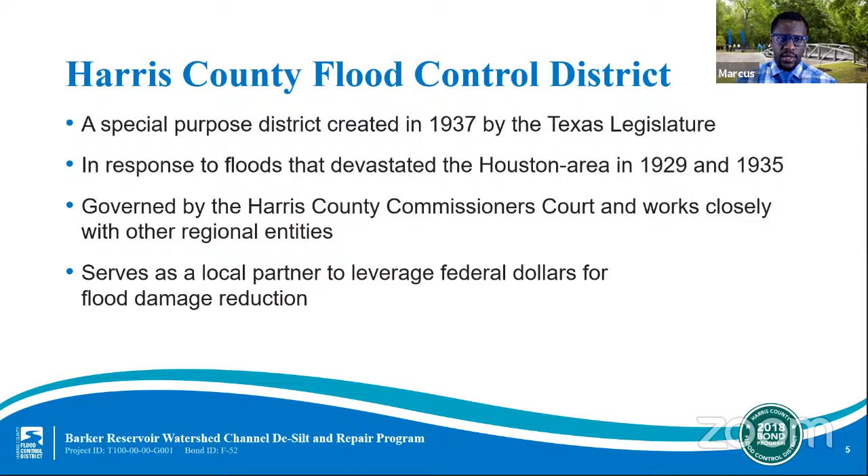The mission of the Harris County Flood Control District is to provide flood damage reduction projects that work with appropriate regard for community and natural values. One of the most difficult challenges we face is constructing effective projects that are sensitive to community and natural values in a highly urbanized area.

Harris County includes 22 main watersheds, totaling approximately 1,800 square miles and more than 2,500 linear miles of channel. 2,500 miles is approximately the distance from New York to California. A watershed is a geographical region of land that drains to a common channel or outlet. Each watershed has its own unique characteristics and needs. The project we're presenting tonight is in the Barker Reservoir Watershed, located in West Harris County.

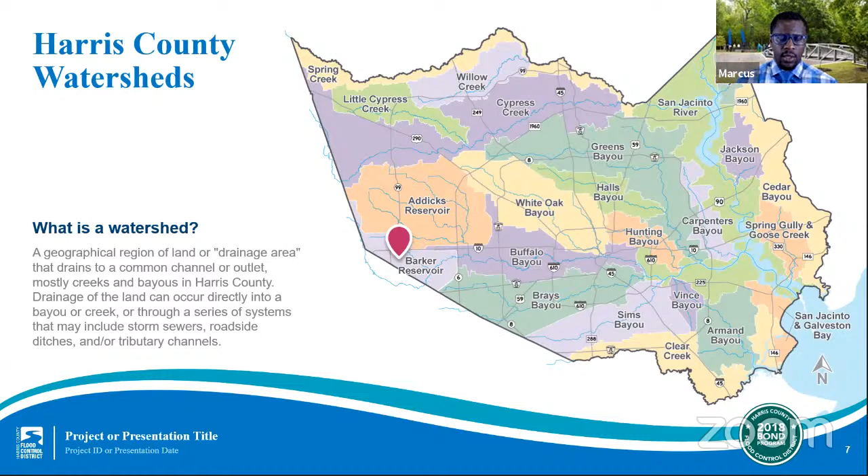Our area is flood prone, and here are some reasons why. We have extreme rainfall, including tropical storms and hurricanes. We have flat, slow draining land. We also have clay soils that do not soak up excess rainfall quickly. While the Flood Control District plays a critical role in the flood risk reduction, we are one of several entities in these efforts in our region.

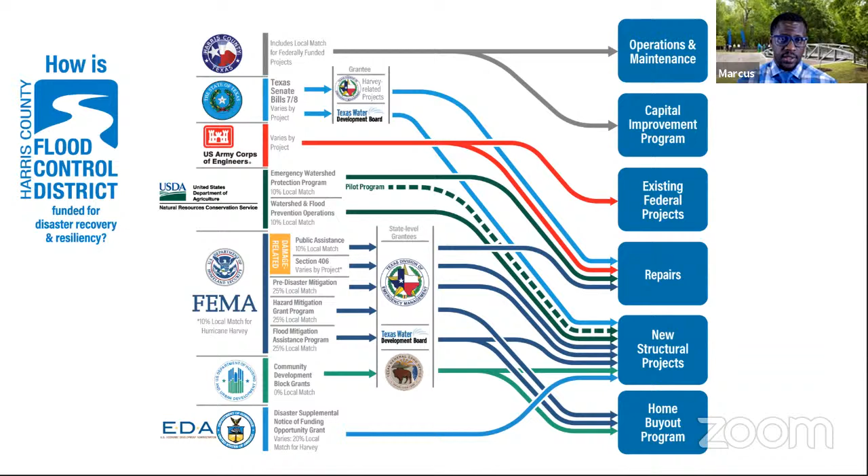This graphic illustrates the many sources of those partnerships, including federal, state, and local funding that the Flood Control District is working to secure for Harris County. Each agency has its own definition of eligible projects and its own requirements for local match funding. So the Flood Control District works diligently to match projects to the right partnership opportunities.

We will now move into the part of the program that is specifically about the Barker Reservoir Watershed Channel De-Silt and Repair Program. There are 47 miles of open waterways that drain into the Barker Reservoir. That makes up the Barker Reservoir Watershed. This program includes 2 phases: the desilting of channels to restore them to their original capacity, and the repair of channels where erosion and slope failures have occurred.

The de-silt work effort began before Hurricane Harvey as part of a watershed maintenance program. This program consisted of channels within the Barker Reservoir Watershed for which the Flood Control District has property rights. The limits of this program did not extend west of the Grand Parkway. Channels included have been previously developed or altered from their natural state.

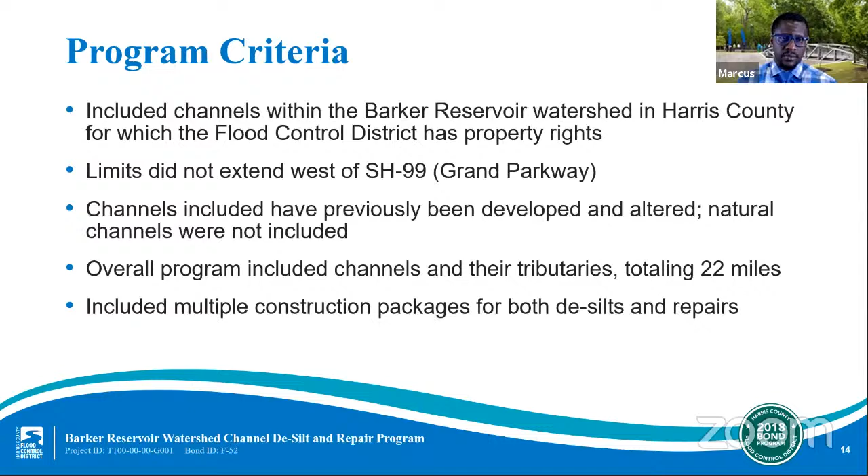The goals and objectives of this program included desilting channels, repairing channel segments, and creating a database for future maintenance efforts. This database will help the Flood Control District effectively develop a maintenance and operations manual.

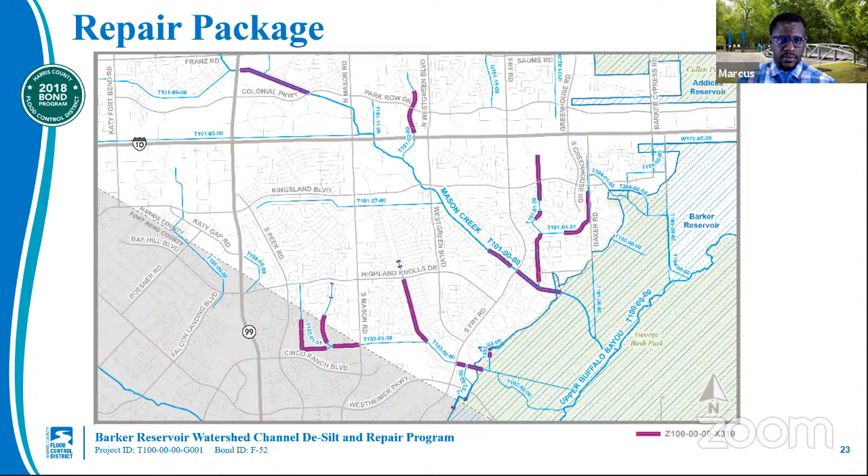This repair package exhibit highlights the areas slated for repairs, shown here in purple. These channel repairs will help stabilize the channel and prevent further erosion and damage to the channel. The current status of the repair package is 60% complete, and the construction is anticipated to begin in spring of 2022.

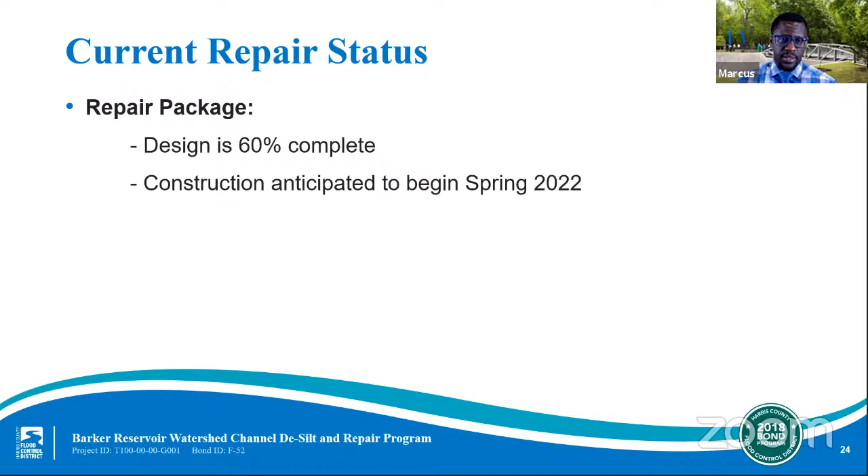So what should you expect during construction? There will be heavy truck traffic and possibly lane closures that run adjacent to our project sites. We will have limited access and/or temporary closures to trails and footpaths. Traffic control will be implemented when necessary along roadways for the safety of the working personnel and the public. Tree removal may be necessary for construction access, and the Flood Control District is coordinating with the appropriate agency for the relocation of trees affected by construction.

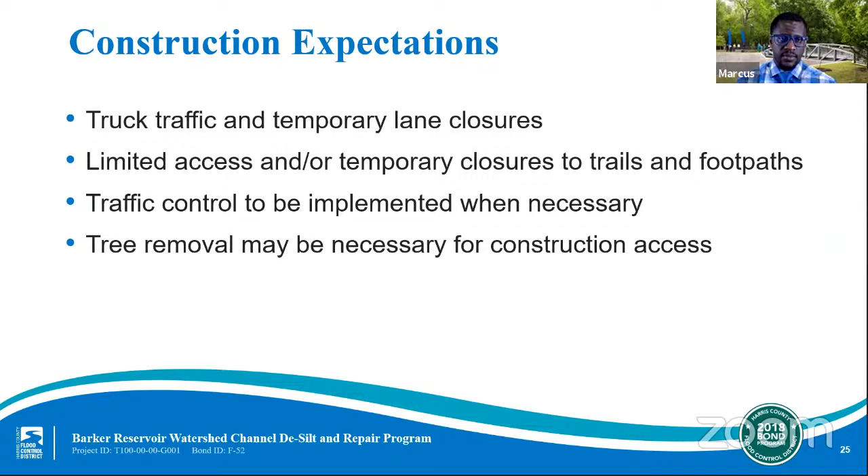So what are our next steps? This is the final community meeting for this program. All updates will continue to be provided on the Flood Control District's website. Construction of the remaining work will continue through fall or winter of 2023. The data collected will be used for future maintenance plans.

While the work on the Barker sediment removal packages has concluded, additional money was awarded by the Federal Emergency Management Agency to the Flood Control District. These funds will allow for additional sediment removal to take place along channels in the Barker Reservoir Watershed. The timing and specifics of those locations are still being determined, and you can read more about the FEMA award on the Flood Control District website in our press room.

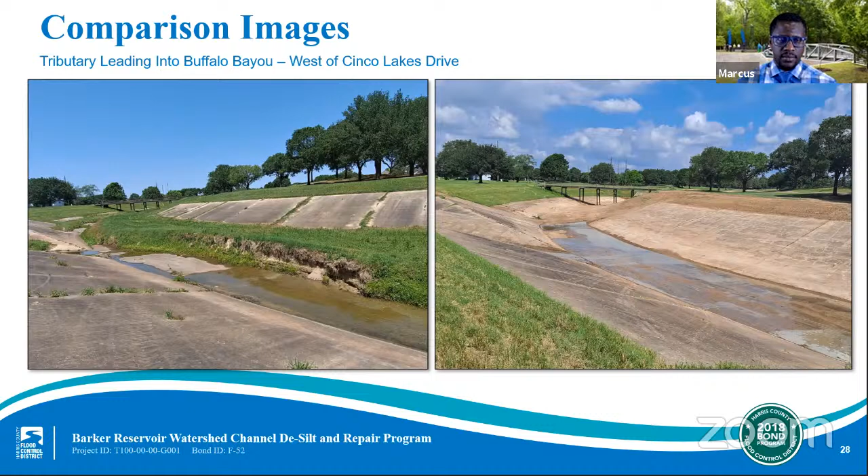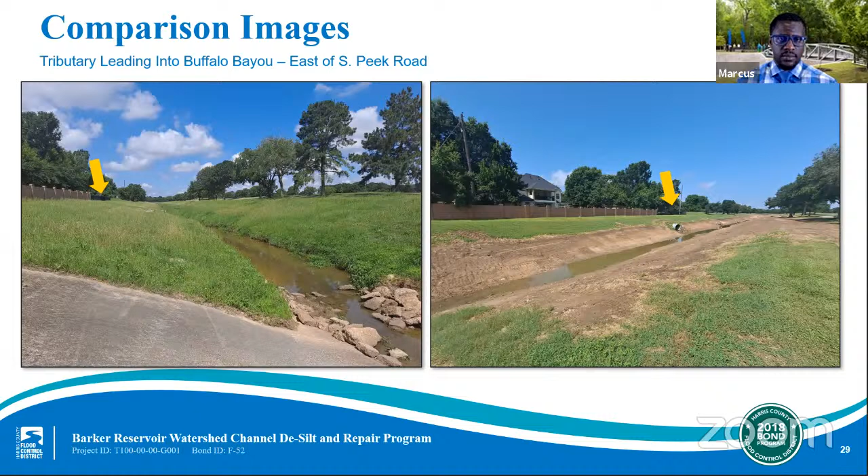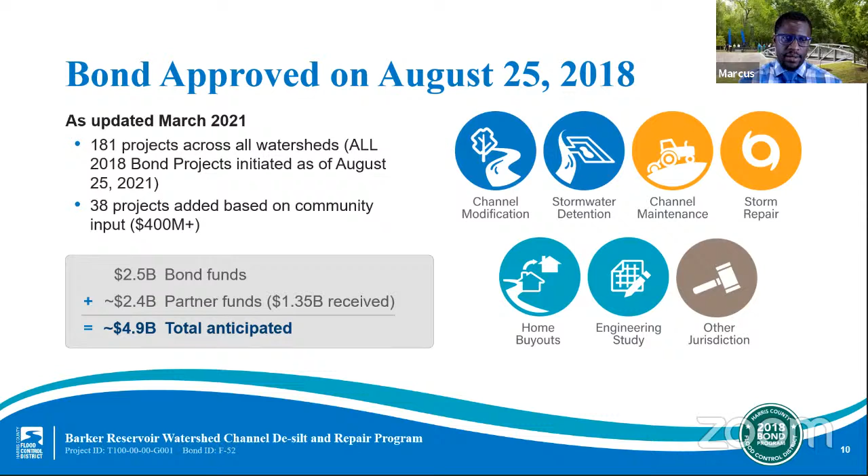Because as we reach towards the end of the bond program in the next 6 to 8 years, that means there's going to be more maintenance necessary. And so right now the district is trying to prepare for that additional operations and maintenance that we know we're going to encounter. But that's a good question. Great. Thanks so much, Marcus.

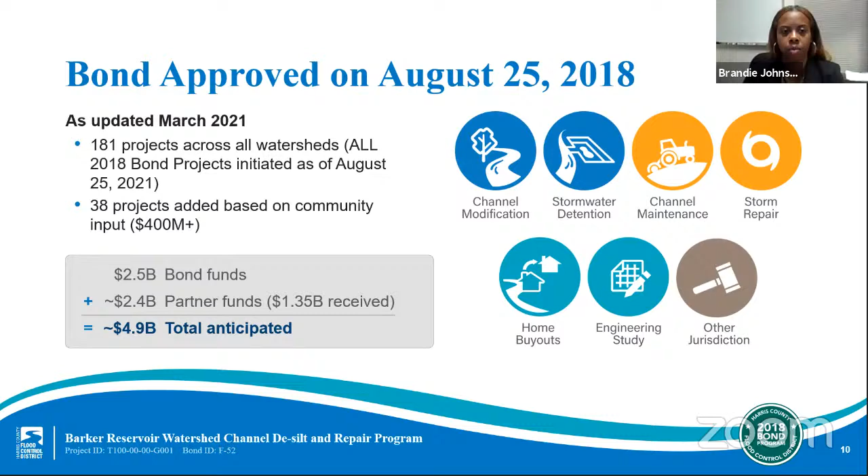Thanks, Brandie. All right, Marcus, I'm going to come back to you for our next one. And this is a great one. A resident is wondering how the recent FEMA funding that you mentioned will be used for future projects. Okay, yes, that's a good question. I somewhat mentioned that in my previous answer. This $250 million that we're going to receive is for the Willow Creek, White Oak, Spring Creek, Little Cypress, Greens, Barker, and Addicks. What we plan to do is bid out, or do what we call request for qualifications, to obtain consulting services to help us manage and design those projects.

As part of those funds, we've been given a certain amount of time to finish the project. I think we have 4 years to complete them, which is why we're bringing on the additional consultants to help us with those other watersheds that I mentioned that the funds will be used for. Okay, great. Thanks so much, Marcus.

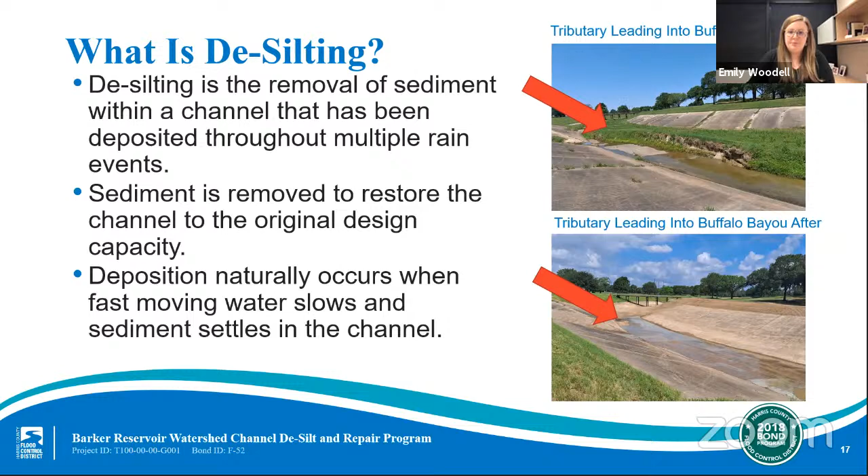The scope of work for the De-Silt included 22 miles of channels and tributaries along Mason Creek and Upper Buffalo Bayou, where Harris County Flood Control has property rights, with the majority of the channels being within Harris County. Approximately 17 miles of the 22 miles of channel were included in the desilting effort. And then the repair package will include repairs along the majority of the channels that we previously desilted.

Perfect. Thanks, Brandie. I'm going to stick with you for our next question, a great one from Susan, asking what the contractor does with the sediment. Is it sold? And wouldn't a fast flowing stream remove the sediment naturally? Good question. The sediment removed from the channels has to go to an approved disposal site. Before the contractor can remove any material off-site, they have to submit where that material will be sent. And once it's submitted, the flood control district will review and approve those disposal sites.

Each channel is designed to convey a certain amount of water, as well as at a certain speed. So by desilting and removing that sediment, it's not going to necessarily speed up or increase the velocity at which the water will flow downstream. It will flow at the same design velocity that it was designed for.

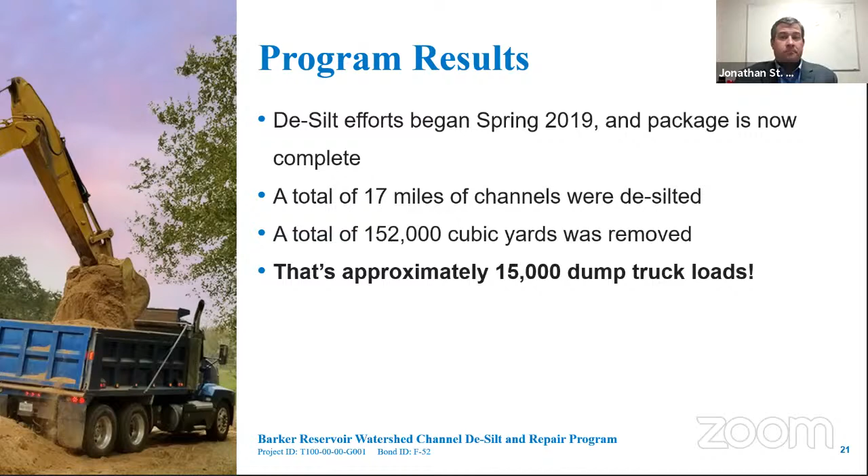Sure. So de-silt projects don't increase flooding risks in any area, either upstream or downstream of the project site. These projects are designed to improve stormwater conveyance by restoring our channels to their original design capacity. And so by removing the silt and sediment, we're just bringing the channels back to the way that they were originally designed.

Perfect. Marcus, on that topic, someone asked why we typically don't dig these channels deeper and wider to accommodate more water. Could you talk about that? Sure. So the intent of this project is to de-silt, right? As Jonathan just mentioned, this is to take a channel that was designed to carry a certain flow, which is what Brandie said. And whenever you start to move outside of those parameters for the original design intent, then you start to do what we call increasing conveyance capacity.

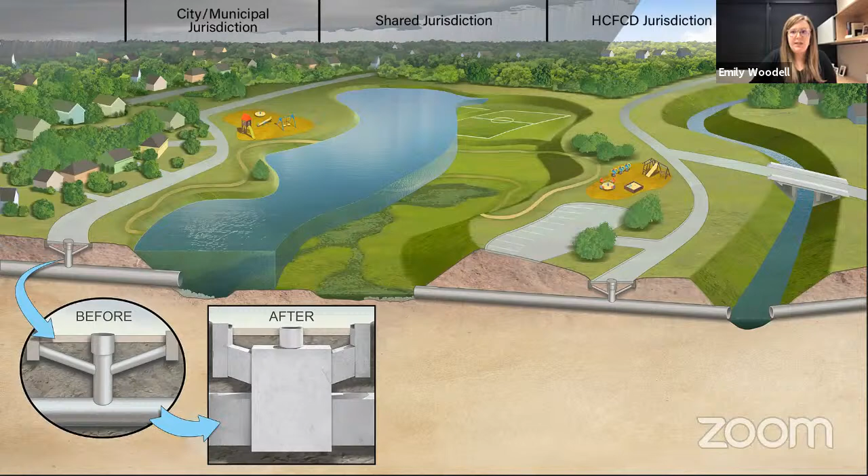Perfect. Thanks, Marcus. And I'm actually going to stick with you for our next one, because we had a very similar question come in about the reservoirs themselves. So they said, instead of all this work, why can't you excavate the reservoirs to hold more water?

Yes, and thanks for that question. And that's also one of the common questions that we get. So the reservoirs are actually owned and operated by the Corps. The flood control district, we don't have property rights to conduct any other work in the reservoirs. So, again, which is why on this program, we sort of focused on the desilting of the channels in the reservoir and working in right of way that the flood control district actually owns.

So the flood control district doesn't maintain the reservoir. That's part of the Corps' effort. And so, questions about doing work inside the reservoir or operations and maintenance of the structures of the reservoir, anything like that, those questions we actually direct to the Corps.

Wonderful. Thanks so much. Brandie, I'm going to come to you for our next question. We've had a couple about this topic. Folks are wondering how trees will be impacted by the project.

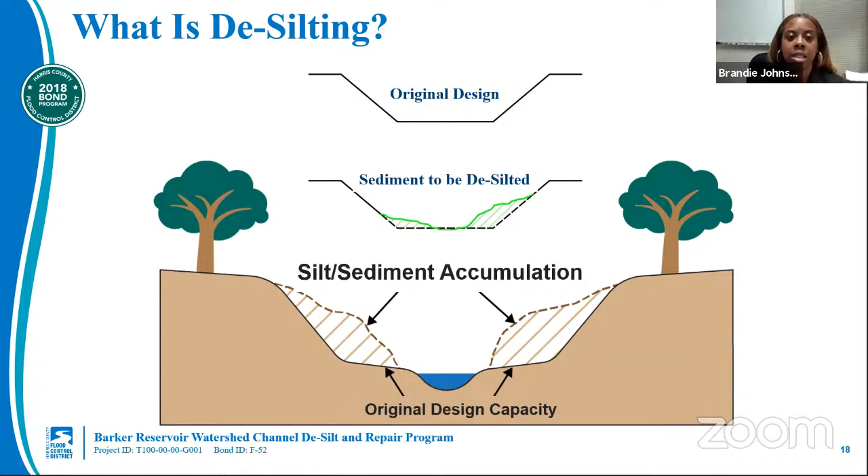An essential part of being able to do the repair project has to do with accessing the project site. So trees can either be trimmed or removed to allow the contractor to be able to bring in equipment and other machinery to do the repairs. So we will work closely with the contractors as much as possible in order to be able to minimize the amount of trees that will be impacted by our repair project.

And in addition, during our design phase, we also try to get with the different entities that may have planted those trees and see if we could potentially relocate those trees so that they won't be damaged, and place them in an area where they won't necessarily affect the access and can continue to flourish and keep a park-like setting within the area or other areas along our channels.

Perfect. Thanks, Brandie. And you actually answered 2 in 1 there. So we had another question come in about trees, and I think Brandie just addressed it beautifully. So Jonathan, I'm going to come to you for our next one. We've had a couple folks ask questions about how local trails and footpaths will be impacted.

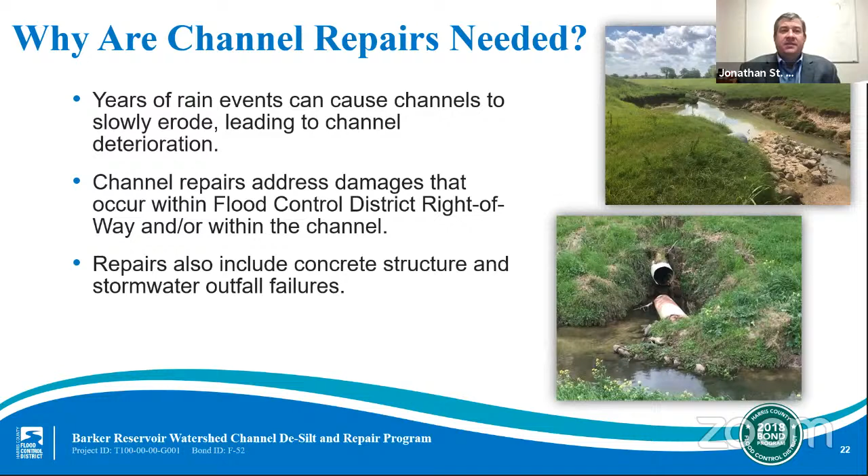Sure. So the trails and footpaths would mostly be impacted during the access portion of the construction. And so as the contractor needs to get equipment in and out of a project site, typically they'll have to cross over some of these trails and footpaths. And so that's where you would see some disruption from time to time on those.

And so the plans for that are to communicate those closures as early as possible. And that would either be via signs on the site or on our website to let you know where these closures were going to happen. And then you would also see some construction fencing around that would make sure to separate those areas and to separate pedestrians away from the access routes of the heavy construction equipment.

And those closures wouldn't last terribly long. Hopefully they would be temporary and would not cause too much of a disruption. But we do have to get our heavy equipment in and out of the project sites. Sure, absolutely. Thanks so much, Jonathan.

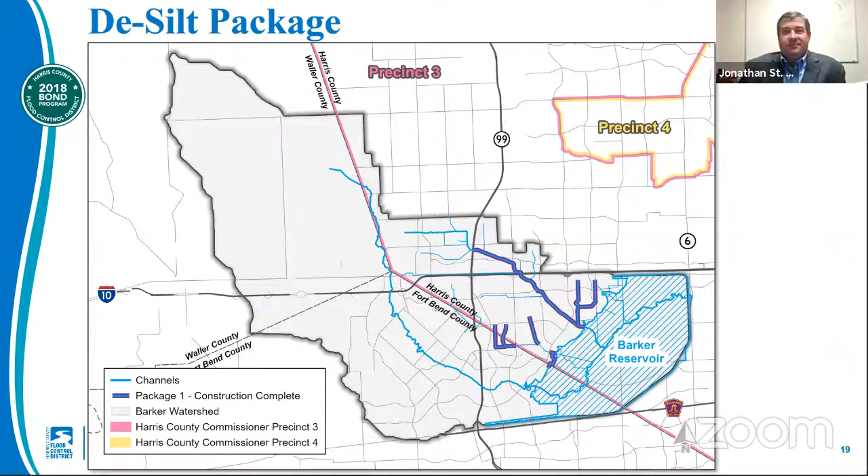That's helpful. Thank you, Jonathan. Okay, Marcus, so I'm going to ask you a question that we get a lot. A resident asked if they have some questions about the mowing of channels in their neighborhood, who do they talk to about that?

So actually they can go through our website and submit it to our community service division. They do get a lot of questions about mowing and when we'll be out there, and they'll be happy to give you information specific to your area. But they're also on the website. There's a location where we have a map that lets you know the last time an area was mowed and tells you the next time we'll be out there.

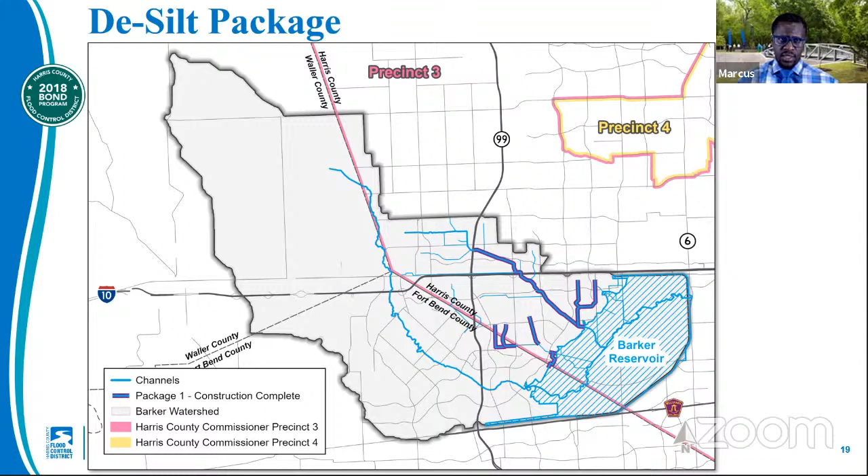We have a mowing cycle of 3 times per year, and that could also give you an idea of the expected time in which we'll be within a certain area to do mowing. But community service division, they do a great job of making sure that they're being responsive, getting out to the residents and addressing some of these issues that the residents bring up. They do a really good job at that. Yep, absolutely.

Okay, Brandie, we had another really good question come through asking, are you removing the trash and larger debris people have thrown into the channels? Yes, a part of the desilting effort did include the removal of large debris and trash from the channels as well. And so if more trash has been dumped when we come out to do repairs, the contractor will pick up that material as well. Great, thanks so much.

And I'm going to stick with you for our next question. We also had somebody ask, when and if these channels start to fill with silt again, who do folks notify? Yes, the residents can go to our website and fill out a service request form. It's a long website link, so the easiest way I suggest is to look in the search bar on the website and just type in service request, and it will direct you to the form to fill out.

There's also a number that you can call to speak to or leave a voice message that can address that inquiry as well. And that number is 346-286-4197. Great, thanks so much, Brandie.

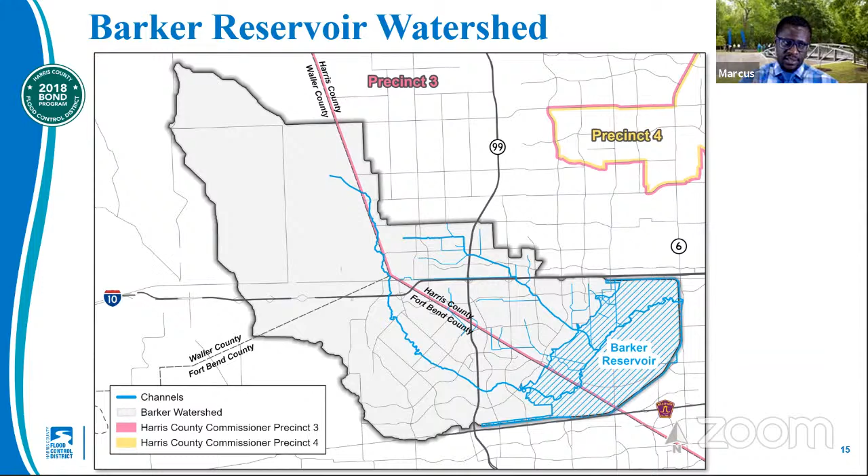But we definitely work with our partners, and whenever an opportunity arises for us to do something together to help the citizens of Harris County, then we're going to move forward with it. Great, thanks, Marcus. And I'll actually take this next question.

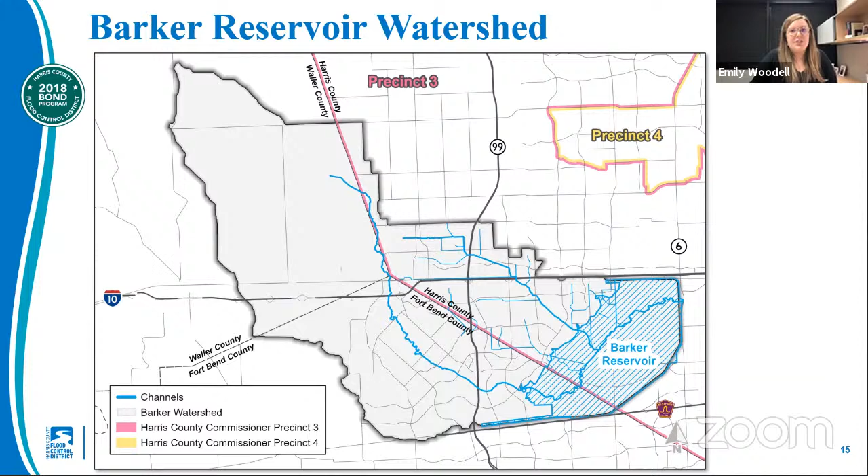A resident asked where they can go to ask questions after the meeting. So we've talked a lot during the meeting tonight, but we really do want to hear from folks throughout the life cycle of this project and other efforts that we have going on across the county. So if you do have additional questions on this project or others, you can visit the website. So that's hcfcd.org/F52. That'll allow you to submit a comment online, and then a Flood Control District representative from the communications team or the appropriate project team member will contact you regarding your specific concerns.

All right, so Marcus, I'm going to send another question your way. Someone asked, after the completion of this program, will the reservoirs handle large rain events such as Hurricane Harvey? And I'll start with the simple answer: probably not. That's probably going to be the best answer I give.

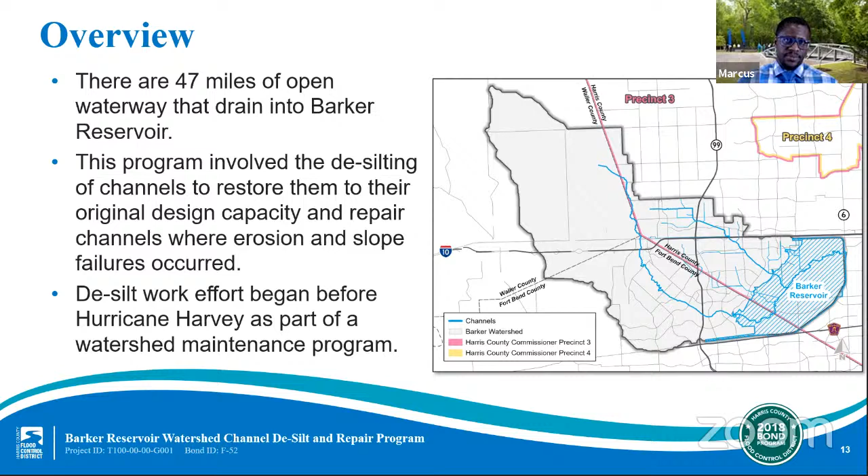It's probably not, just because the intent of this was to, again, restore the channels to their original capacity, which the reservoirs were already designed to handle, what we understood to be the original capacity of those tributaries that go within the reservoir. But again, just like the previous question I responded to, we just don't have the property rights to do anything within those reservoirs, and questions as they relate to operations or any type of work inside those reservoirs should be directed to the United States Army Corps of Engineers. Perfect. Thanks, Marcus. That's a helpful clarification.

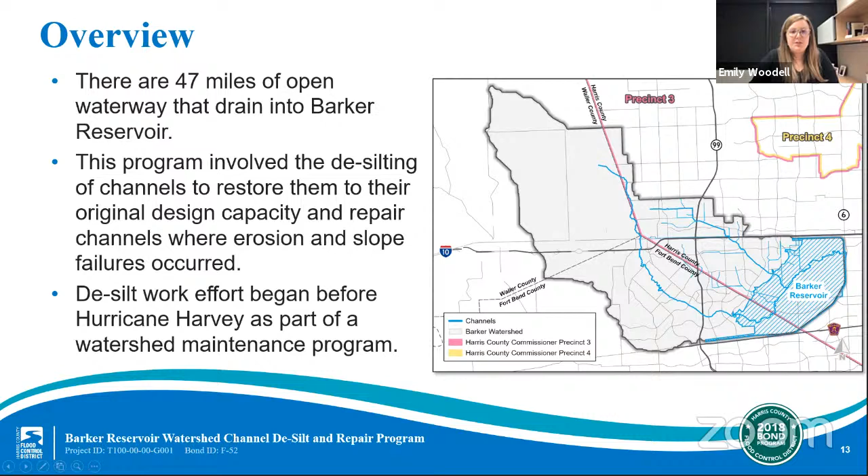Okay, Brandie, I know you touched on this previously, but we had another question come in about which channels precisely are part of the De-Silt and Repair program. So do you mind just touching on that again briefly? Sure. If you would like a more in-depth look at the locations of the channels, please visit the website, because there are maps for the De-Silt and the repair packages, so that you can get a closer look at what channels were included.

The channels that were included were channels where Harris County Flood Control District has property rights. And so this included channels along Mason Creek and Upper Buffalo Bayou and their tributaries. We evaluated approximately 22 miles of channel to see what work needed to be done. And of those 22, 17 miles of channels were included in the De-Silt packages, and then the repair packages will come back to a majority of those channels to do work as well. Perfect. Thanks so much, Brandie.

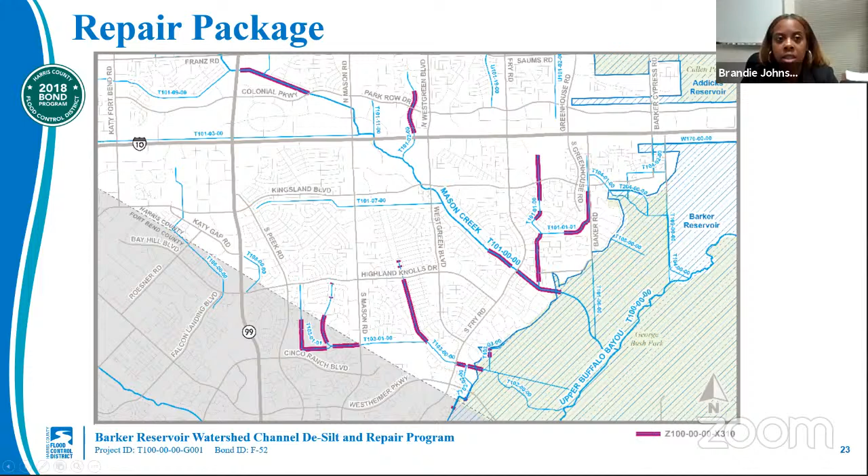And I'm actually going to stick with you for our next question, which is from Sandra. She wanted to know when the Barker channels will be desilted again. The time frame is to be determined. After major rain events, our maintenance group or infrastructure group will go out and evaluate the channels just to see what damages or if large amounts of sediment have deposited within those channels. And at the conclusion of this program, as a part of our routine maintenance going out after every storm event, we will establish a general rule of thumb of when channels need to go back and be reevaluated.

Once we have done those evaluations, we will see how much can be put into a project, because even though sediment may have deposited in the channel, it may not be enough sediment to warrant a project at that time. What I mean by that is the cost for construction to go out there to do the work may not see the benefit of removing that sediment. So what we would do is combine all of the sediment that needs to be removed and package that together to develop a sediment removal project in the future. So that time could be a year from now, it could be 5 years from now, just depending on what kind of work the channels may need.